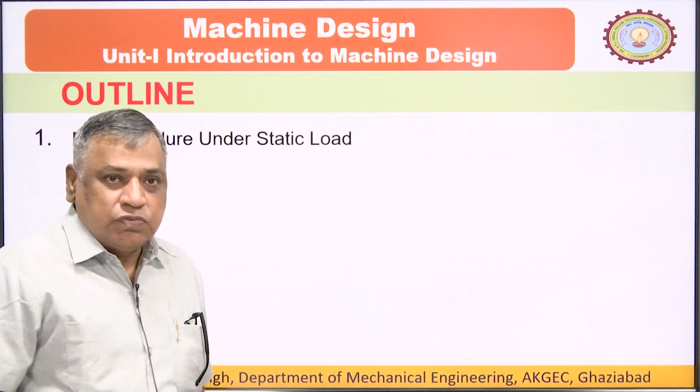So the content of this lecture includes: first, what we covered in the last lecture, that is modes of failure under static load, of which there were 3 modes. Then factor of safety, a simple number I discussed in the last lecture, and the optimum factor of safety should be included in the design to make your design successful and safe.

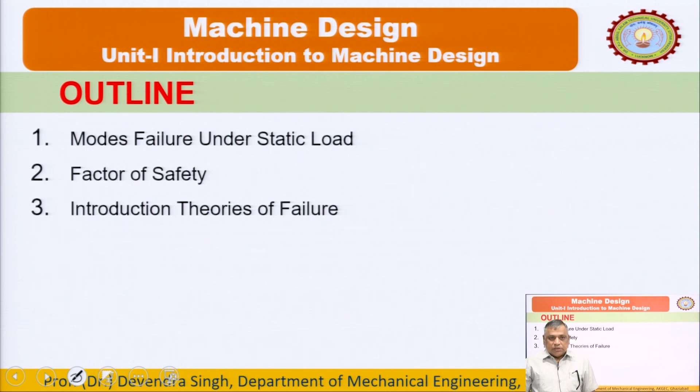Then we will discuss the introduction to theory of failure, starting today in this lecture. Then we will discuss maximum principal stress theory, maximum principal strain theory, and maximum shear stress theory.

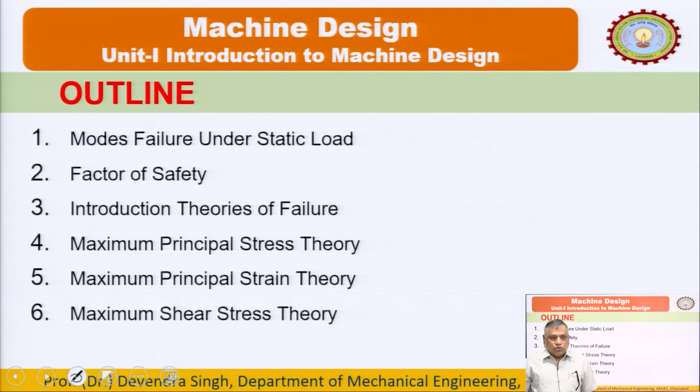So what is theories of failure? As I already told you, in the uniaxial state of stress it is very simple to formulate the design equation, but in case of complex state of stress, we need to find the induced stress which should be compared with the material property or allowable stress to make the design equation.

So to deal with the complex state of stress, we had to think of something, and this came in the form of the theories of failure. There are 5 theories of failure primarily.

These are the maximum principal normal stress theory, also called Rankine's theory, named after its originator; maximum strain theory, Saint-Venant's theory; maximum shear stress theory, that is the Tresca and Guest theory; then maximum total strain energy theory, that is Haigh's theory; and maximum distortion energy theory, von Mises and Hencky theory.

In fact, maximum strain theory and maximum total strain energy theory are not in use; these 2 theories of failure have already become obsolete. Maximum principal stress theory, maximum shear stress theory, and maximum distortion energy theory are in use for design purposes, but for academic purposes we will discuss all these 5 theories of failure.

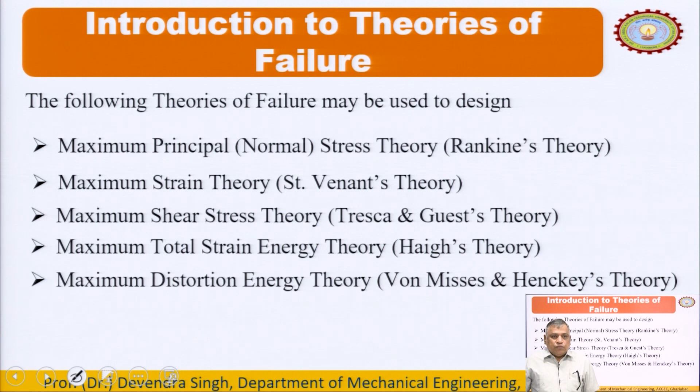So first is the maximum principal stress theory. This theory is primarily useful, and we use this theory of failure, for brittle materials.

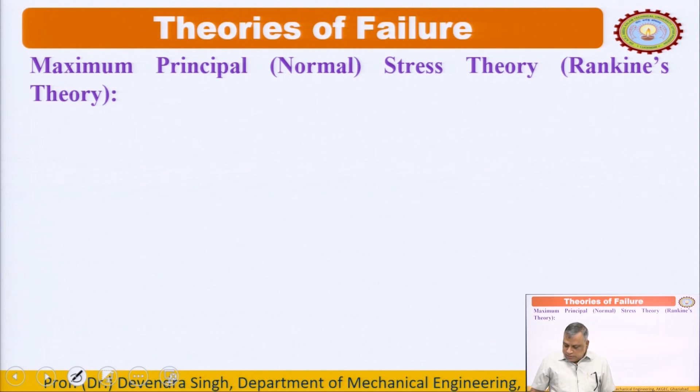So the statement you can see is: the material is going to fail as soon as any of the principal stress reaches a value equal to or greater than the yield point in tension.

Suppose there are three principal stresses sigma 1, sigma 2, sigma 3. This condition may occur where sigma 1 is greater than sigma 2 is greater than sigma 3. So if sigma 1 is the largest, and sigma 3 is the smallest, if sigma 3 is greater than or equal to SYT, then it means our design is going to fail. We have to change the design, change the material, or design the dimensions accordingly to make our design successful.

And if sigma 1, which is the largest principal stress, is less than SYT - SYT I consider as the yield point in tension - and I have told you that this maximum normal stress theory is applicable for brittle materials. So in case of brittle material, we do not use SYT, we change it to SUT, meaning ultimate tensile stress.

So if sigma 1 is less than or equal to this, it means our design will be in a successful condition, and if sigma 1 is greater than or equal to SUT or SYT - SUT in case of brittle material, SYT in case of ductile material - then it is a failure condition.

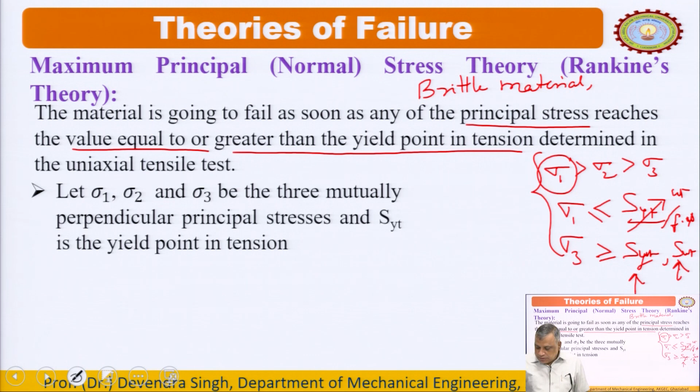Let sigma 1, sigma 2 and sigma 3 be the three mutually perpendicular principal stresses, and SYT is the yield point in tension if I am dealing with ductile material. But if the material is brittle, then I will use SUT, ultimate point in tension.

Then sigma 1 is less than or equal to SYT, sigma 2 is less than or equal to SYT, sigma 3 is less than or equal to SYT. These are the successful conditions.

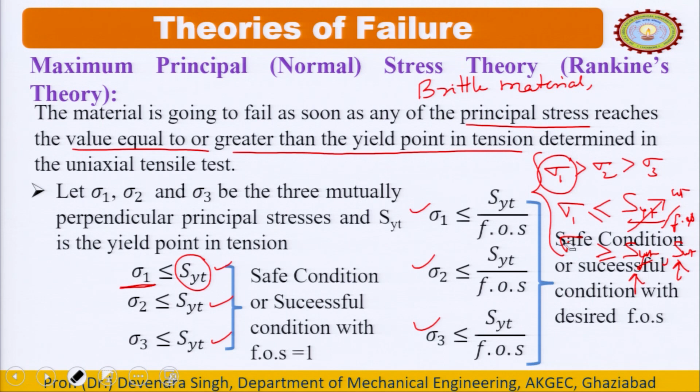We need to find out sigma 1, sigma 2, sigma 3 as per the given state of stress, and we will have this design equation with SYT or SUT as per the material - these are the known quantities. So this is the philosophy. This is the safe condition, this is the safe condition with desired factor of safety.

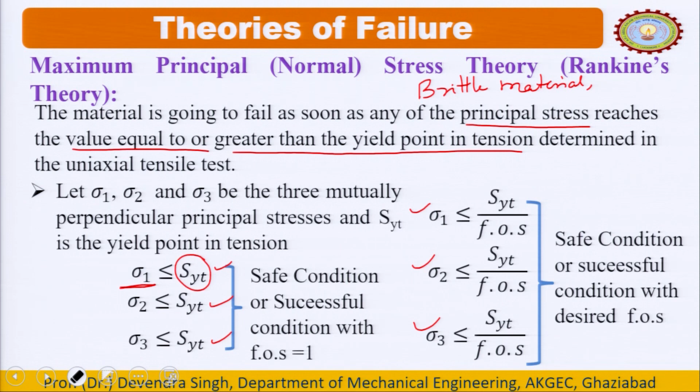So, as per principal stress theory or Rankine's theory, now the graphical representation: sigma 1, sigma 2, sigma 3 should be less than or equal to s y t, and plus sign means the state of tensile nature of loading, while negative means compressive.

Here it is assumed that s y t in tensile must be equal to s y c in compression. This is an assumption that the material has the same yield point in tension and compression, so I will write s y c in place of minus s y t.

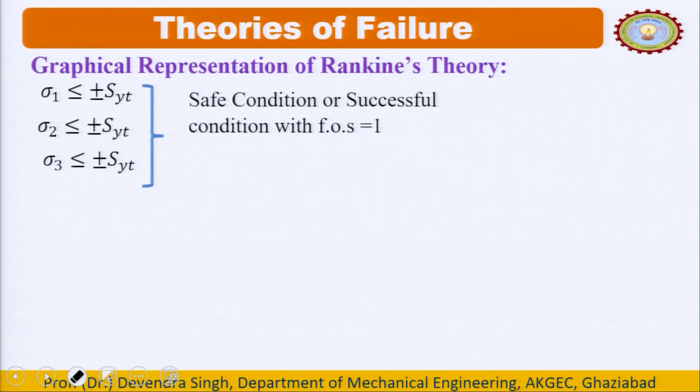To draw the safe condition for factor of safety 1: if the largest principal stress is less than or equal to s y t, the material remains safe. I have discussed this in the last slide.

First we draw the planar stresses on the sigma 1 sigma 2 plane, using the same convention as coordinate geometry. On the right hand side of the origin is the positive sign, that is tensile; upside is tensile; left side and downward is compressive or negative. So O is the origin here, and then we mark s y t on the right hand side.

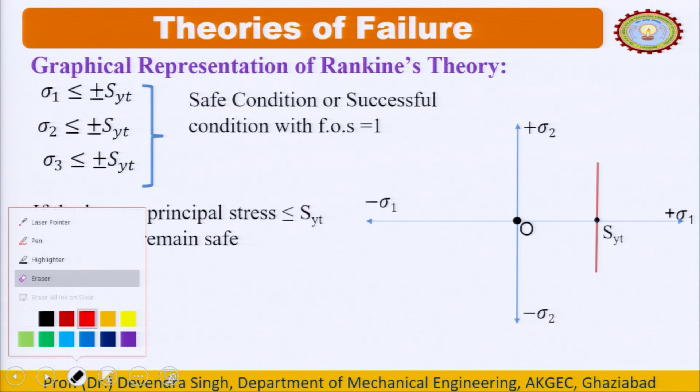So sigma 1 equals s y t. This is the line sigma 1 equals s y t, a line having a constant abscissa value, the sigma 1 value.

Then s y c, I will replace it with minus s y t, or you can write s y c. The s y c and s y t are equal in magnitude; if the material is different, this may vary. So sigma 1 is less than or equal to s y t is our safe zone on this side, and sigma 1 less than or equal to s y c is also the safe zone.

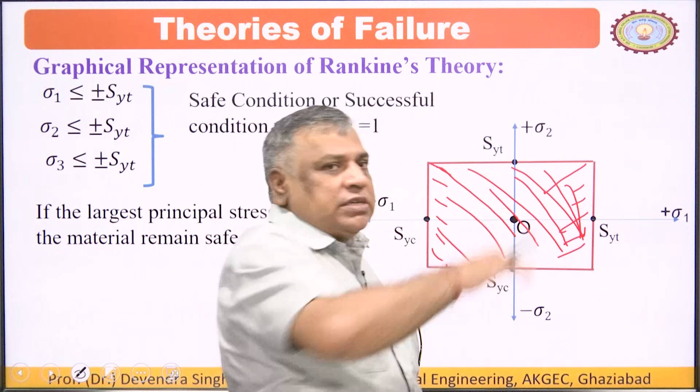Similarly, for positive sigma 2 s y t, the line where the ordinate is constant is parallel to the abscissa at s y t, and if this is in compression, this is another line. So this is completely the safe zone, where if your loading condition lies inside this rectangle or square, your design is successful with factor of safety equal to 1.

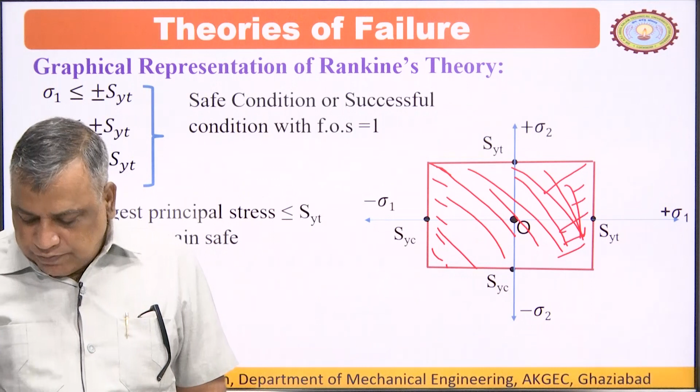If you want to design with a desired factor of safety, you have to divide the failure stress by the factor of safety, and you will get a smaller rectangle or smaller square for the safe design. So this colored zone is the safe zone.

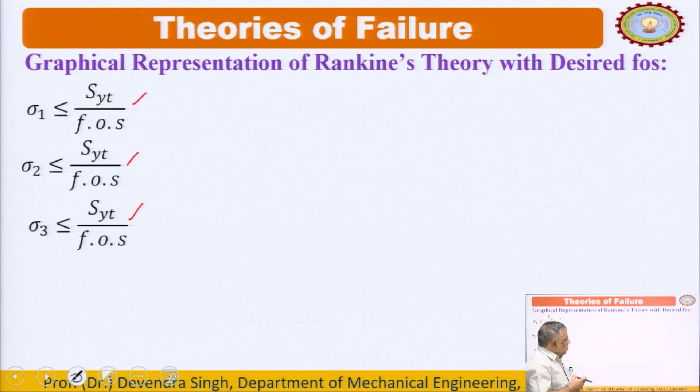Now this is Rankine's theory with desired factor of safety. Here is the design equation where we want to incorporate some factor of safety. Same procedure to plot the safe condition: if the largest principal stress is less than or equal to SYT upon FOS, the material remains safe under the loading condition. This is the sigma 1 sigma 2 plane, and again we find out the points.

This is the origin, then SYT is there, this is the earlier line drawn in the last slide, this is SYT for sigma 2, this is SYC for minus sigma 2. This forms the rectangle or square; if SYT equals SYC, it is a square, otherwise it is a rectangle. So this is the safe zone with factor of safety 1.

Now, failure stress divided by factor of safety gives a new point SYT upon FOS. This is the line in the sigma 1 sigma 2 plane. Similarly, on the left hand side, SYC upon factor of safety gives another line, and for sigma 2, SYT upon factor of safety, similarly forms the safe zone.

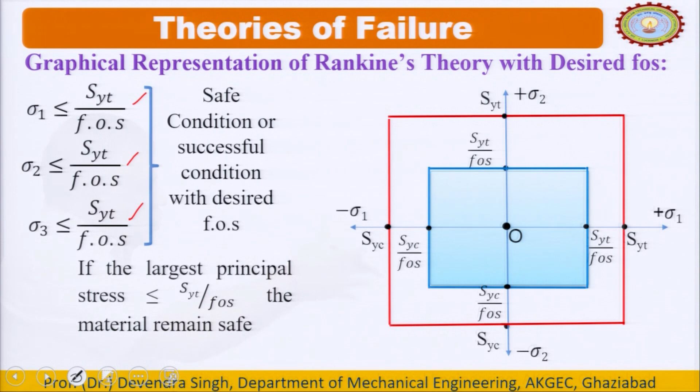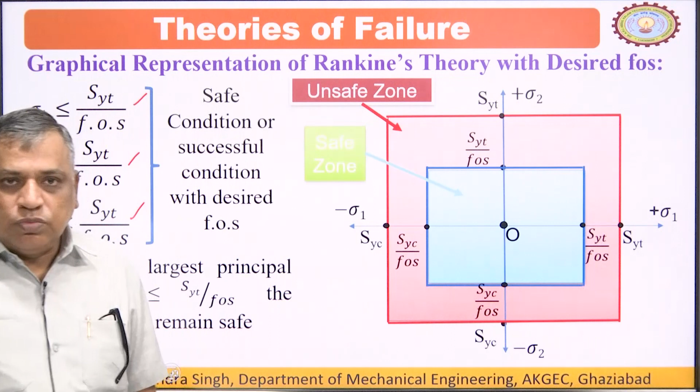This colored zone is the safe zone with factor of safety according to the maximum principal stress theory, Rankine's theory, and the white zone outside this but inside the larger rectangle or square is called the danger zone or unsafe zone for this factor of safety. That is why I have shown this area in red as the unsafe zone, and in green as the safe zone as per Rankine's theory.

Now, the next theory is the maximum strain theory, or Saint-Venant's theory.

The statement was: if the induced stress or any principal stress reaches a value equal to or greater than the yield point in tension under the simple uniaxial tensile test, then the material is said to fail.

Here the property we will compare, the critical property we will consider, is the strain. So if I write strain, or principal strain, or normal strain in place of stress, then this statement becomes the maximum strain theory, or Saint-Venant's theory.

And strain is related to stress because, as far as strength design is concerned, we want to keep our design within the elastic limit, or if possible within the proportionality limit, so that Hooke's law remains valid. So strain is directly proportional to stress, and E is constant, which is a material property. So if our stress is low, the strain should also be low. These things come to mind, now let's see what the difference is.

So first we see the statement: the material is going to fail as soon as any of the maximum normal strains in any direction reaches a value equal to or greater than the strain at the elastic point.

Here I write this elastic point as y because when I convert the statement into an expression for strain, I will use Hooke's law and the tension during the uniaxial tensile test. This is the statement. So if epsilon 1, epsilon 2, epsilon 3 denote the strains, then

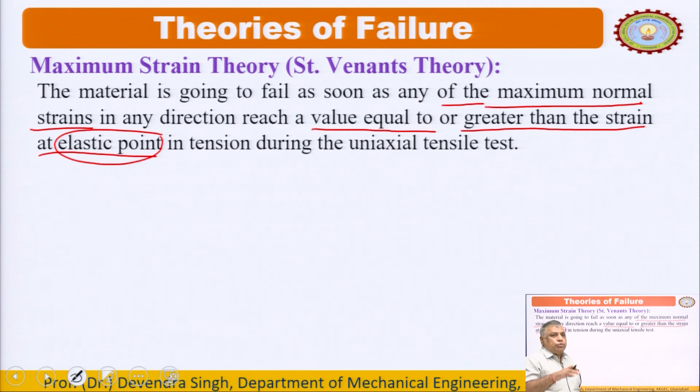epsilon 1, epsilon 2, epsilon 3 are the strains in the directions caused by the stresses sigma 1, sigma 2, sigma 3, which are the principal stresses. So what you can write is that this is the loading condition in which sigma 1, sigma 2, sigma 3 are the three mutually perpendicular principal stresses.

Now if epsilon 1, epsilon 2, epsilon 3 are the three mutually perpendicular principal strains, and epsilon y t is the strain at the yield point in the material when it is subjected to the tensile test.

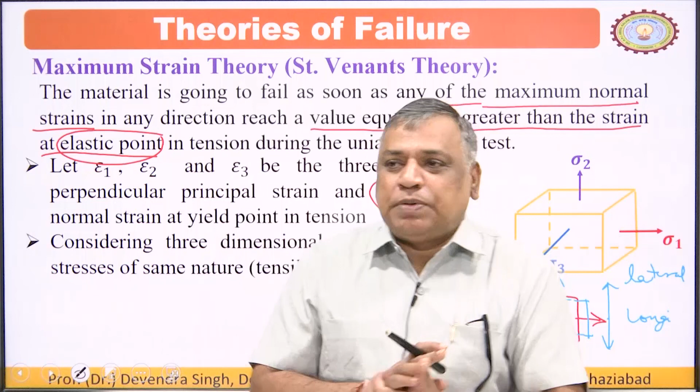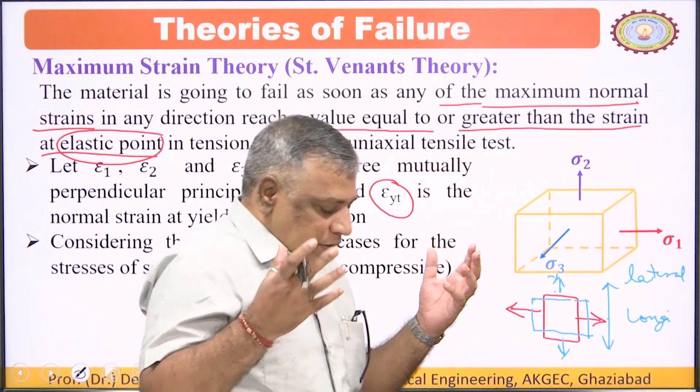तो आप डिसाइड कर सकते हैं साइन whether it is additive or subtractive easily. So, on that basis if these are the same tensile or compressive, अगर ये same nature की होंगी तो हमेशा माइनस साइन एक्सप्रेशन आने वाला है.

You can remember if they are opposite in nature, एक टेंसाइल हो दूसरी कंप्रेसिव हो, तो वो एक दूसरे को ऐड करेंगी और इसलिए एडिशन में आएगा। तो हम नेट स्ट्रेन की बात करें।

एप्सिलॉन 1 की बात करें और हमने टेंसाइल ले रखा है तो सिग्मा 1 अपॉन ई, सिग्मा 1 की वजह से सिग्मा 1 की डायरेक्शन में कितनी स्ट्रेन है - सिग्मा 1 अपॉन ई।

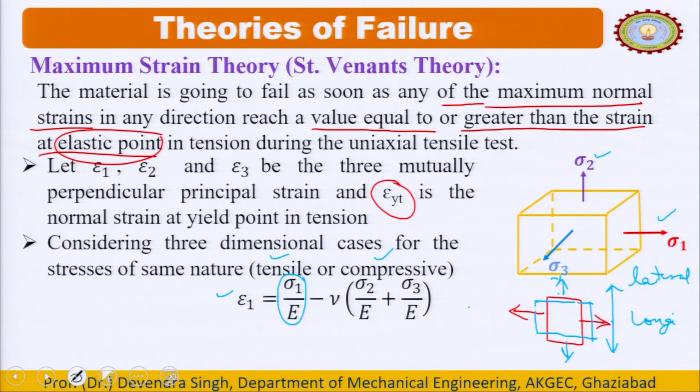और अगर सिग्मा 2, सिग्मा 3 ये और ये भी सेम नेचर की हैं, टेंसाइल हैं, तो न्यू इज पॉइसन रेशो। न्यू इज द पॉइसन रेशो।

सबको मालूम है व्हाट इज पॉइसन रेशो। पॉइसन रेशो इज लेटरल अपॉन लॉन्गिट्यूडिनल स्ट्रेन।

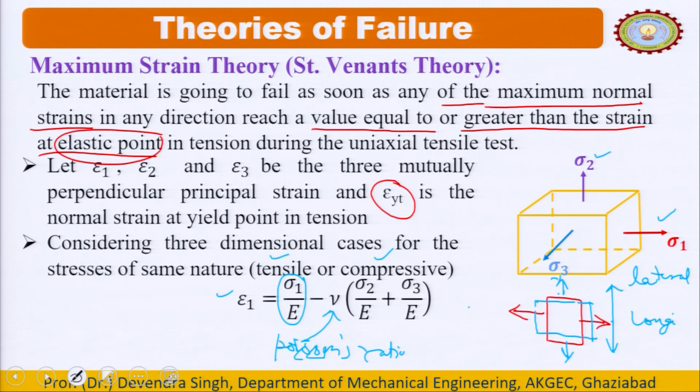सो न्यू टाइम्स सिग्मा 2 अपॉन ई। सिग्मा 2 अपॉन ई जो लेटरल डायरेक्शन में कंट्रीब्यूट करेगा तो इसे घटाने की कोशिश करेगा।

ये इसे खींचेगा तो वापस यहाँ पे अगर हमने ये सिग्मा 1 माना, ये सिग्मा 1 माना और फिर सिग्मा 2 को देखा, सिग्मा 1 यहाँ तक लेके आया, इसे सपोज यहाँ तक एक्सटेंड कर दिया। सिग्मा 2 को मैंने एब्सेंट माना था।

अब मैंने सिग्मा 1 को एब्सेंट माना और सिग्मा 2 को लगाया तो सिग्मा 2 इसे ऊपर लेके आ रहा है। अब कितना इफेक्ट दोनों एक साथ लगाएं तो कितना इफेक्ट - उसके लिए एक प्रॉपर्टी है मटेरियल की दैट इज पॉइसन रेशो।

यू हैव लर्नड इन योर strength of material. So, sigma 1 upon E minus nu sigma 2 upon E, plus similarly you can consider the effect of sigma 3, that is also in tensile in nature.

So, the strain caused in the direction of sigma 3 is sigma 3 upon E, and in the perpendicular direction it will contribute with negative sign nu. So, this is the net strain epsilon 1 in the direction of sigma 1 under the effect of sigma 1, sigma 2, sigma 3. This you have already learnt in your strength of material.

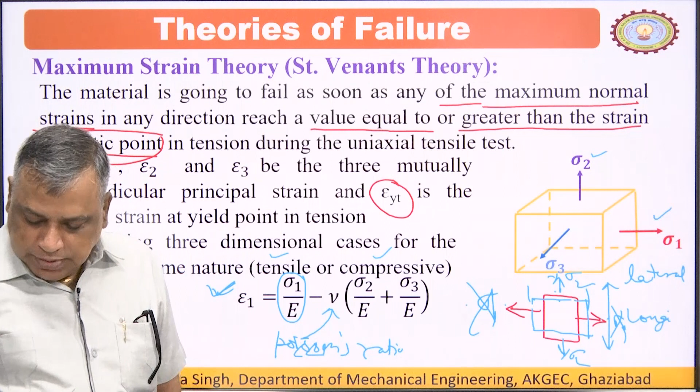Similarly, you can write for epsilon 2 and epsilon 3. Similarly, you can analyze these easily. These are your expressions.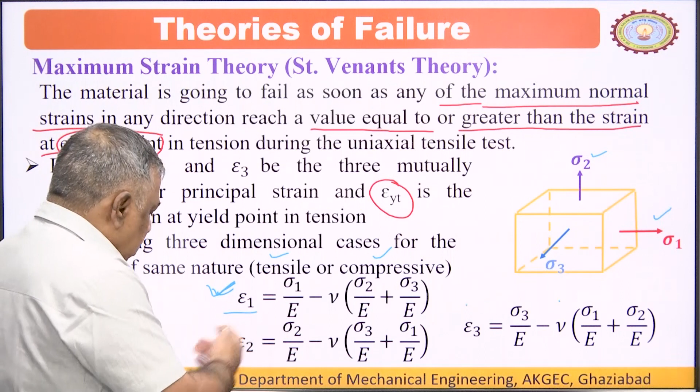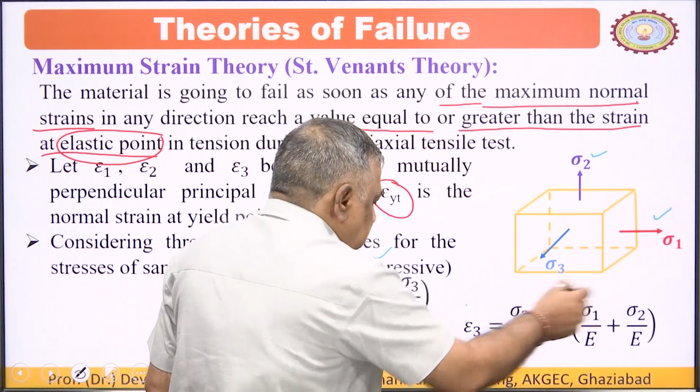So, first term is always whatever direction. So, epsilon 1, sigma 1 upon E, and remaining 2 in some way negative, minus nu. Epsilon 2, sigma 2 upon E is the first term, 3 and 1 in sum in the bracket multiplied by minus nu, add कर दें और sigma 3 upon E. These are the net strain in the direction of sigma 1, sigma 2, sigma 3.

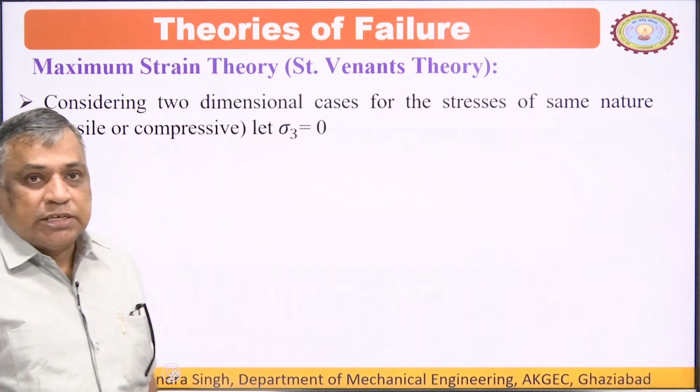So, now for two dimensional cases, planar stresses, we are moving towards the graphical representation. So, we will take let sigma 3 is equals to 0. So, if you see sigma 3 is equals to 0 here.

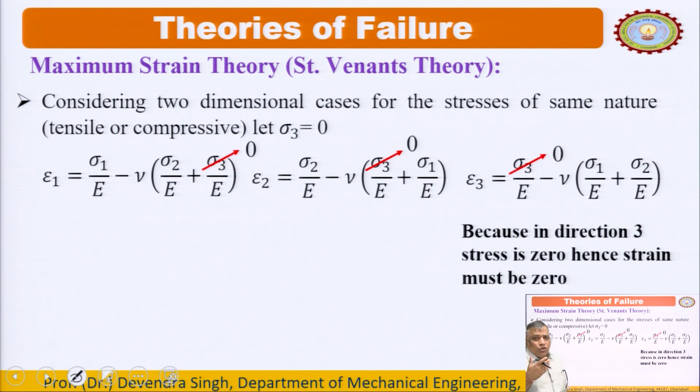So, what is epsilon 1, epsilon 2 and epsilon 3. So, put sigma 3 is equals to 0 in this expression, what you will get - sigma 3 I made equal to 0, here sigma 3 is equals to 0. In fact, in the direction of 3, stress is 0. So, as per the Hooke's law, epsilon 3 is equals to also 0.

So, the equations which are available for us for our interest - this is epsilon 1 is equals to sigma 1 upon E minus nu sigma 2 upon E, epsilon 2 is equals to sigma 2 upon E minus nu sigma 1 upon E. These two equations remain for us.

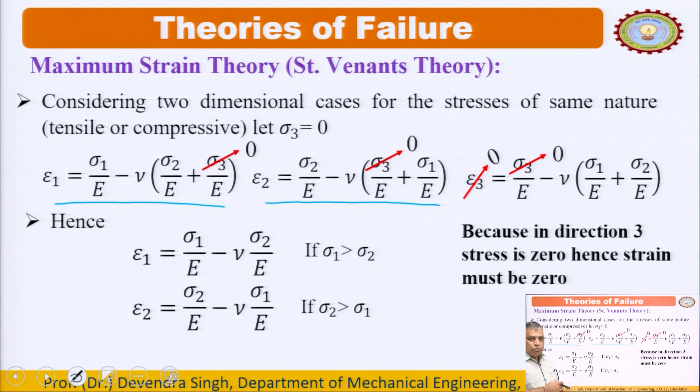This is 1, if sigma 1 is greater than sigma 2, then sigma 1 upon E minus nu sigma 2 upon E in epsilon 1 direction, then epsilon 2 is sigma 2 upon E minus nu sigma 1 upon E, if sigma 2 is greater than sigma 1, that condition you can show.

Now, factor of safety. So, epsilon max must be less than or equal to epsilon et or epsilon yt. Et is the elastic limit, that I have already mentioned why I am using this elastic limit.

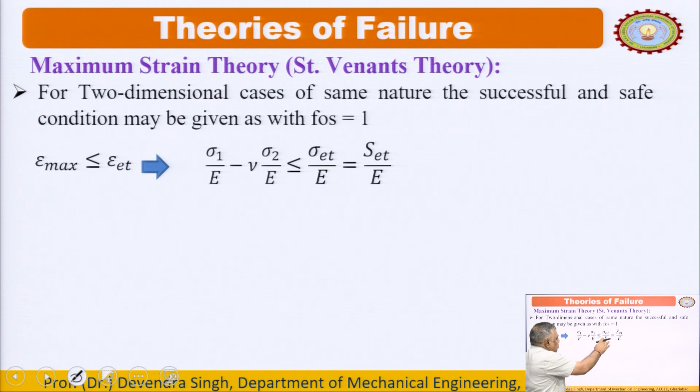This should be sigma 1 upon E minus nu sigma 2 upon E should be less than or equal to sigma et upon E, is equals to Set upon E. And if you take this, sigma 1 minus nu sigma 2 is less than this. So, these are the expressions, sigma 1, sigma 2 tensile.

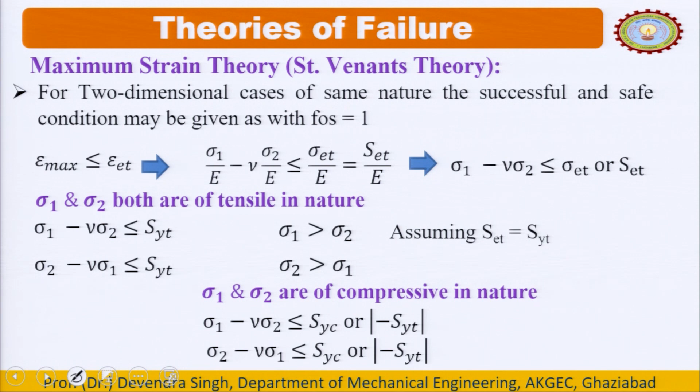So, these are our theory of failure in terms of the stresses, maximum strain theory. Next theory of failure I will start in the next lecture. Thank you very much.